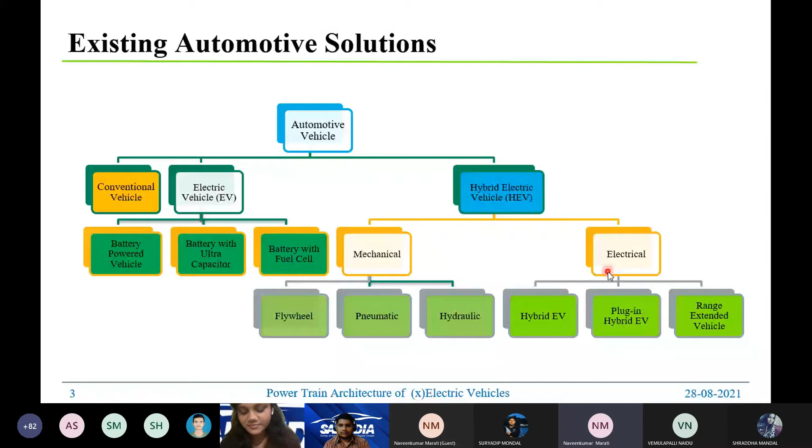So, what is the major market driver for electric vehicles, or different standards of Bharat standard which I might come across today? Today, you might all know we are in the considered stage of Bharat standard 6.

How has it been evaluated, or how has it been made into a vision, because of the first and primary reason being CO2 regulation or NOx regulations, which have impacted us to change from BS1 to BS6 today.

Further, it will be changing into hybrid vehicles or electric vehicles. The regulations have been imposed by the Paris Agreement or by different countries at different stages, and today India has been set a milestone that we have to reach 113 grams carbon dioxide release per kilometer as today's standard by 2021. But western countries like Europe and the US are far ahead of us. In the European region it is 95 grams carbon dioxide release per kilometer, and if you are not meeting this condition, the OEMs will be penalized heavily on their powertrain.

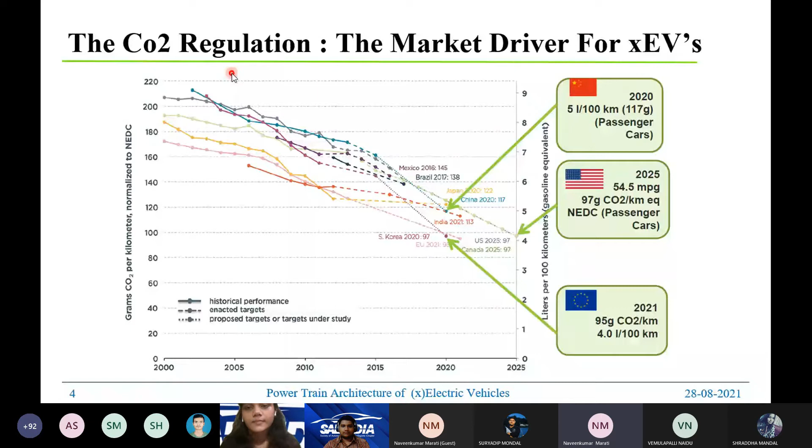So to meet this combination of regulations, one needs to optimize their powertrain. How do they optimize it? As said in the earlier slide, it may be with respect to battery electric vehicles, hybrid electric vehicles, or different optimization parameters in the vehicle. Today we are under the BS6 standard, and tomorrow it may be a hybrid or pure electric vehicle based scenario. So to achieve this 113 grams carbon dioxide per kilometer in 2021, I need to think about optimization in the powertrain. How do I do that optimization?

There are different ways to do optimization, and some of those are listed here, based on where the maximum loss in the powertrain is happening. One of the losses in energy in a powertrain accumulates around 17% in idling mode. What exactly is idling? Idling is when you keep your vehicle in standstill mode during a traffic condition. Generally we keep our vehicle stopped in traffic. During that time, if your vehicle is consuming energy from the powertrain, that energy lost in that situation is called idling. So the energy lost during that particular stage is 17%.

Today many powertrain engineers or OEMs are concentrating on reducing this particular energy loss. With this, there are OEMs who have increased efficiency by 5 to 6% overall. One such example is the latest Activa models, if you can see in two-wheelers.

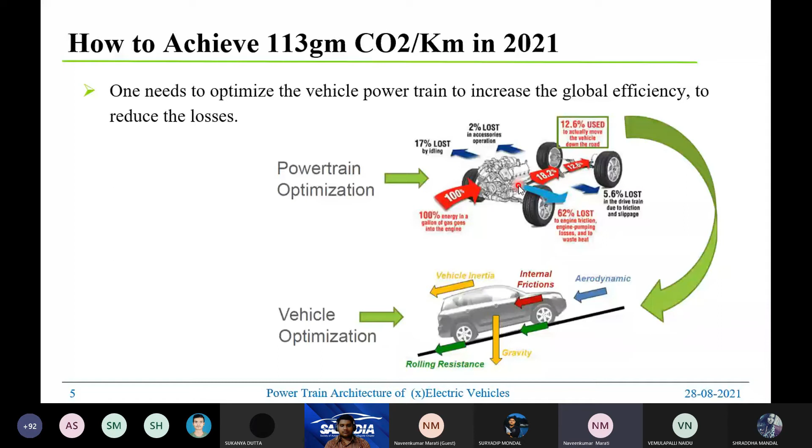So who is going to measure these particular emissions, or who is going to certify these emissions or powertrain certifications, or what is the test procedure that this vehicle is releasing this particular emission in the vehicle? So there are standards called WLTP, which is called Worldwide Harmonized Light Vehicle Test Procedure.

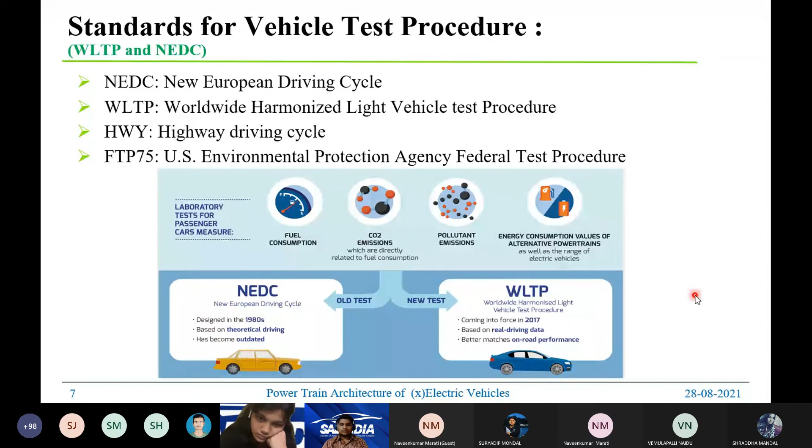So if you see at different speed and different time, it will be tested according to a start and very high speed, and they will stop very frequently, and they will test with different velocity profiles for this particular test procedure. If you see in the blue one, NEDC used to be tested at 120 kilometer per hour, whereas WLTP will be tested at 131 kilometer per hour with real-time driving data on road. So these are the test specifications which are going to certify the emission of the CO2.

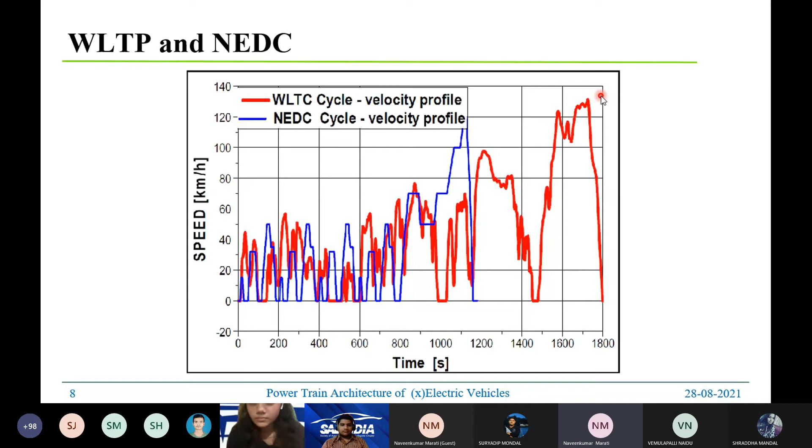And coming to who and how the OEMs have been transitioning to clean vehicles in India, you might have already heard about many of these which I have located here, like many Indian OEMs like Tata, Mahindra, or BYD, which was Goldstone BYD earlier, and today it is Olectra, and Toyota, which majorly gives the electric buses, and Honda, Toyota, and different OEMs have been releasing their models into the market at different stages. And there are the top-end SUV models like Tesla, Audi, that have been entering the Indian market to deploy their hybrid and electric vehicle models in India.

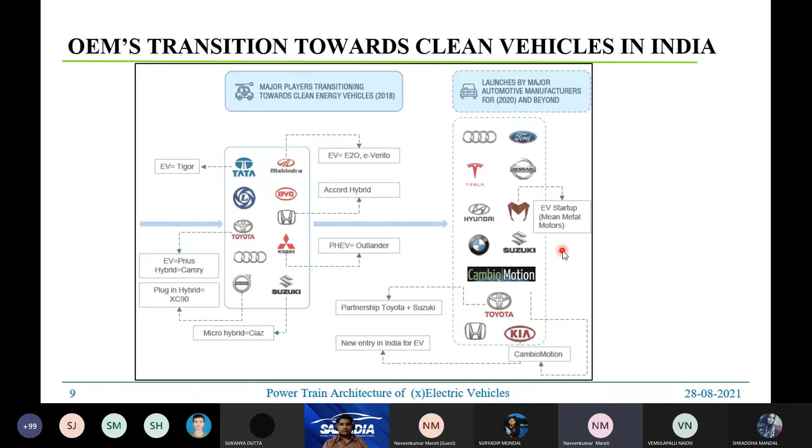And in 2020 and 2021, we have come across a lot of models in four wheelers and a lot of two wheelers, and many startups have been launching their vehicles. And recently, one e-mobility solution provider has launched a vehicle in India at a very good mileage. So this is how India is transitioning from 2018 to 2020 and beyond, how the vehicle launches have been happening, how the market is going to update, and how the Society of Indian Automobile Manufacturers is predicting the sales of total automotive vehicles.

If you see, by 2026, the projection is 6 crore 32 lakh vehicles are going to deploy onto Indian roads. And today, this projection might have increased because of the COVID situation. Everybody has given first priority to health, and in those situations everybody is looking for a personal vehicle. So this projection has also increased, and at maximum it may reach 7 crore 44 lakh vehicles, and a median of 6 crore 88 lakh vehicles may deploy onto the road with a GDP of 5.8%. So this is an overall basic picture of why and how the growth of hybrid, electric, or conventional vehicles in India is projected till now.

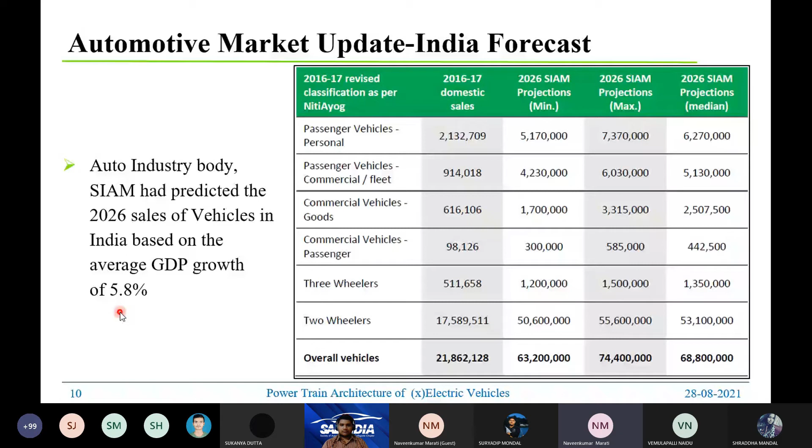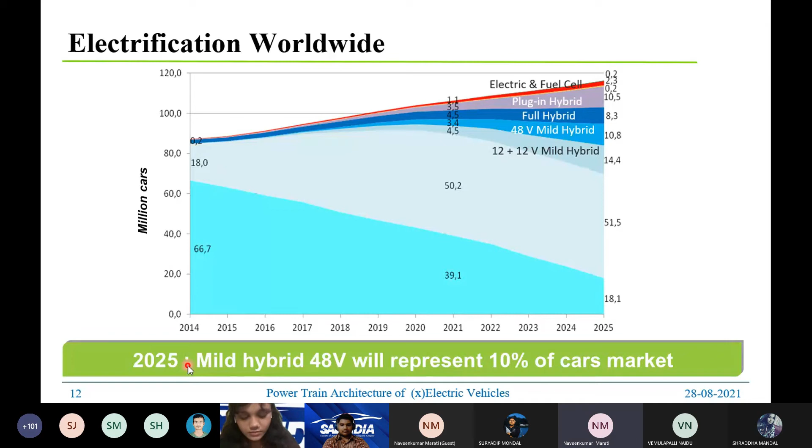And the electrification worldwide is here. If you see, the millions of cars sold with respect to the years is deployed here. This is mainly for the four wheelers. By 2025, 48-volt mild hybrid will represent at least 10% of the car market. So the 48-volt mild hybrid will play a crucial role in the automotive revolution by 2025, in fact.

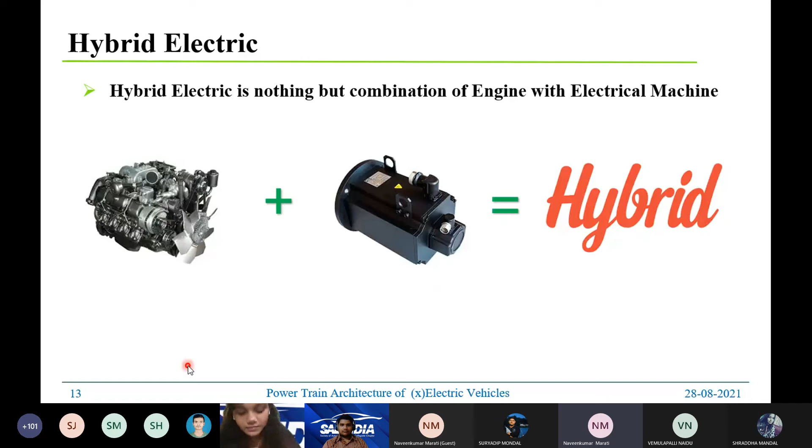And what exactly is a hybrid electric vehicle? It is nothing but a combination of your combustion engine plus an electric machine. So how this electric machine is going to assist this engine will classify different hybrid electric vehicle topologies. Based on where the machine is kept and how it is going to function, that will describe whether it is a mild hybrid, a micro hybrid or a plug-in hybrid in the hybrid electric vehicle classifications.

So the first commercial hybrid electric vehicle, you might have heard, is the Toyota Prius in 1997. Prior to that, in the 1900s, the first hybrid electric vehicle came, and the concept of hybrid electric vehicle started with the phenomenon of regenerative braking in the electric vehicle. At that time, the electric vehicle used a 6-volt lead acid battery. And till now, more than 11 million Toyota hybrids are sold worldwide, and many other OEMs have entered and are selling their hybrid models in the market today.

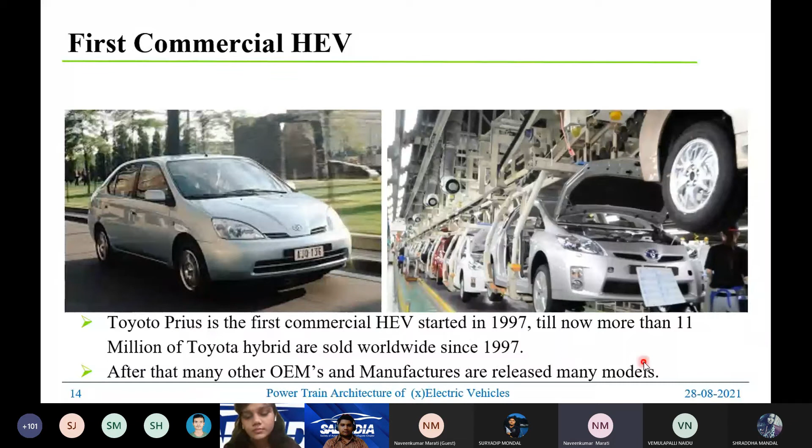So these are the 5 extra components added in your vehicle when you compare a simple conventional vehicle with a simple hybrid electric vehicle. And you will see there is an extra auxiliary battery, which the conventional vehicle generally has as well, to power your infotainment system. So we will discuss in detail how these configurations happen and what the features are which differentiate your hybrid electric vehicle powertrain.

First one, as I said, idling stop, which is nothing but a stop-start system. When the vehicle stops in traffic, your vehicle should not consume any energy from your engine, which is called the idling stop condition. Second one is energy recovery through braking, called regenerative braking: when your vehicle is in braking mode, energy should be recuperated into the battery. During that time, your bidirectional converter will activate and convert AC energy into DC.

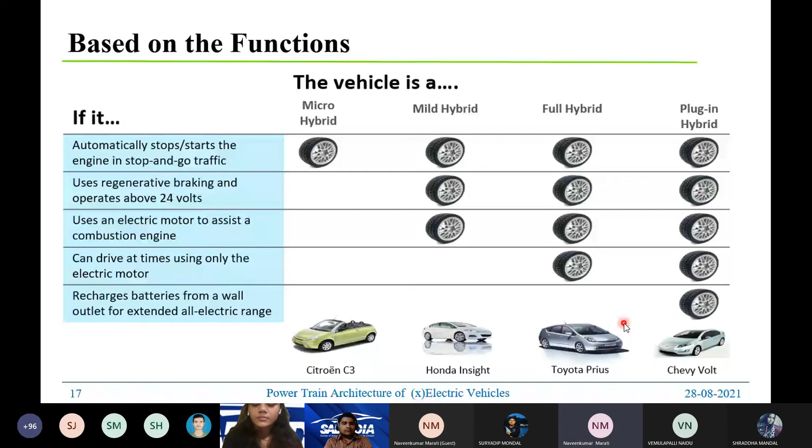And what are the powertrain requirements? Means how do you select which engine, what is the engine capacity unit, or what is the machine capacity unit, and how it is going to require. So when I go with a vehicle in the market, customer is going to look for some of the features or the technical specification requirements in the vehicle. So from there, the requirements of the powertrain will come.

So first one is, the requirement of powertrain is to develop sufficient amount of power to meet the demands of electric vehicle or vehicle performance, carry sufficient energy on board to support vehicle driving in the range, and demonstrate high efficiency with low fuel emissions. These are basic requirements for any powertrain which a customer looks for.

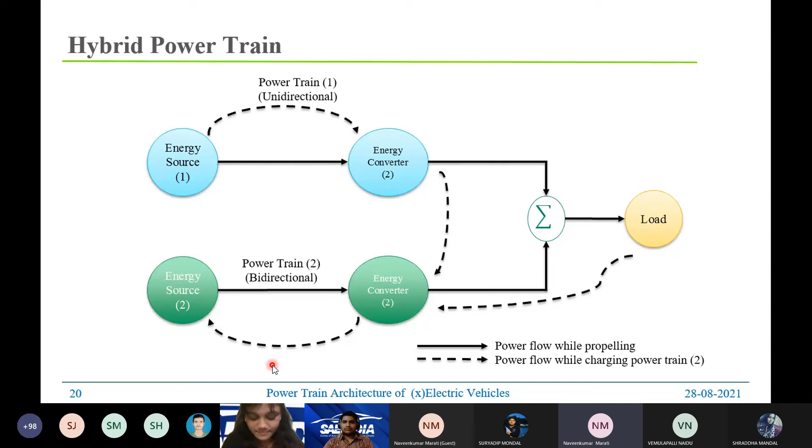other few conditions as well. We will see the next slide. So these are different ways of the energy exchange between your source 1 to source 2 and to the load, and this is how different levels of power delivery happen between your powertrain 1, powertrain 2 and the load.

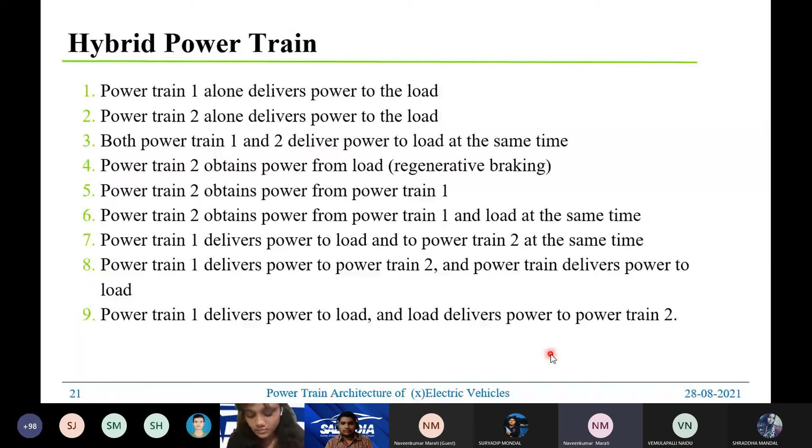So how the classification of hybrid electric vehicle happens, or the main agenda of today's topic, architecture definition of hybrid powertrain. So the architecture of hybrid powertrain is classified majorly into four, but in the market you may see popularly two, which is series hybrid and a parallel hybrid configuration, and there are two more, series parallel hybrid and a complex hybrid structure, which are not much popular or at the research stage itself.

That depends on requirement. So in the series parallel, you will use both the ways. IC engine will connect as well as it will charge the battery. And there are three machines used in the complex hybrid, which is not much popular. And series parallel may be much used in commercial vehicles like buses at least. So if you see in the series hybrid, there are two electric machines used. One is the generator and the motor. Whereas in the parallel hybrid, you will use only one, which is electric motor in it.

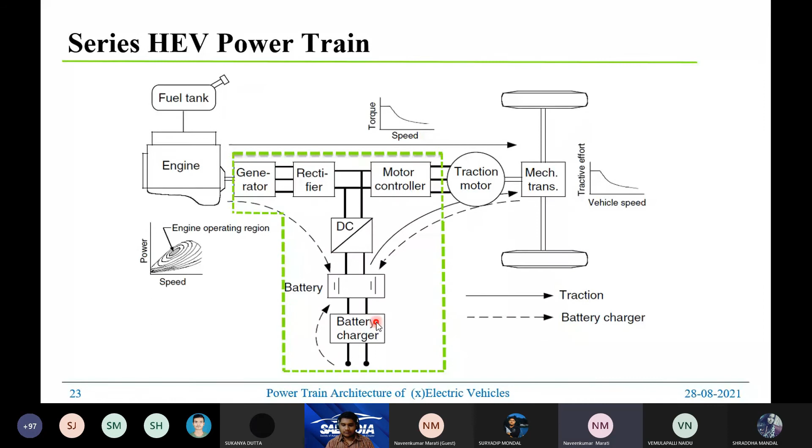And there are particular operations we have here: pure electric mode, pure engine mode, a hybrid mode, engine traction plus battery charging mode, a regenerative braking mode, battery simple charging mode, and hybrid battery charging mode. So these are the different varieties of operations that can be performed on this series hybrid architecture.

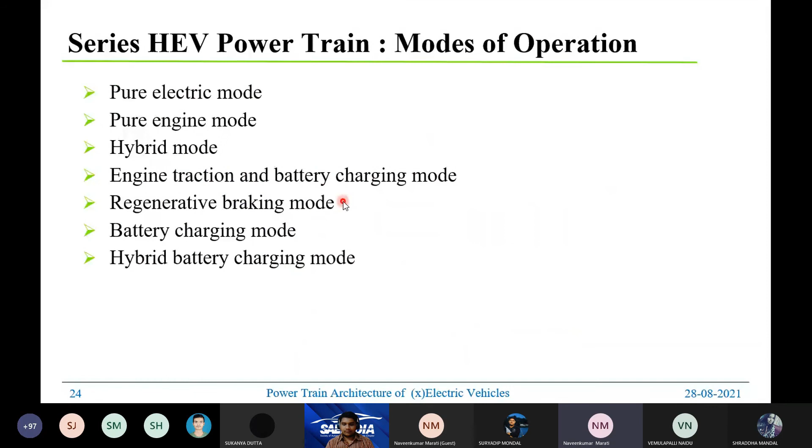If you give the command acceleration, then the vehicle controller will immediately speak with your engine controller and peak powering source, as well as the motor controller, to provide a certain amount of power requirement to accelerate the vehicle at a required acceleration level or required deceleration level.

And if the operation command from the driver or the user is the braking mode, it will directly give the signal to the vehicle controller. Further, the vehicle controller will give the instruction to the motor controller and mechanical brake so that the vehicle speed will come down as well as the braking will happen in the vehicle wheels.

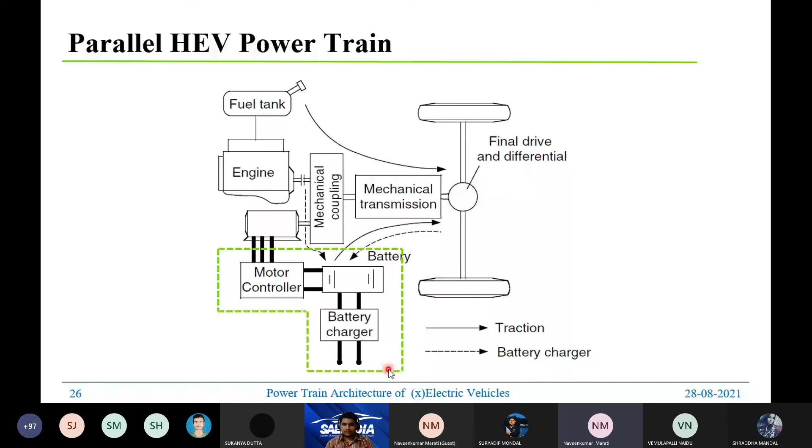So the different operational modes which we can expect here are hybrid traction mode, where both engine plus your electric machine can assist to drive the vehicle at a certain speed. Then engine alone traction mode and motor alone mode, regenerative braking mode, and battery charging from the engine. So these are typical modes of operation in the parallel operation.

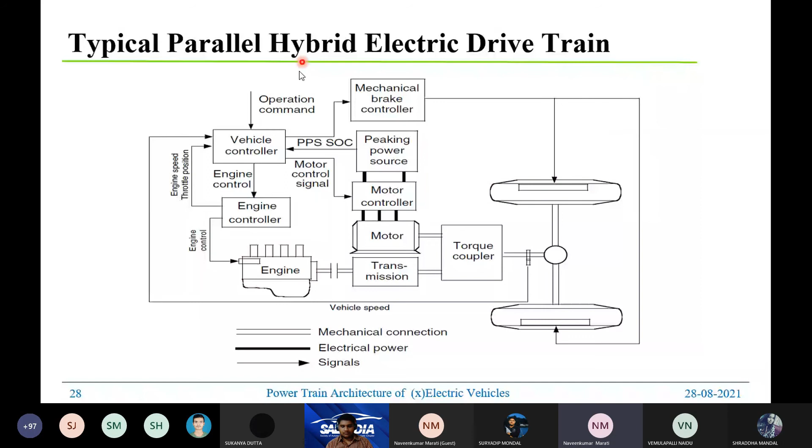And the commands will come again in the same fashion: the vehicle user can give the commands acceleration or deceleration or braking mode. Based on this, the vehicle controller will activate engine, motor, and the brake controllers depending on the requirements. How exactly this vehicle controller will behave internally, we can see in the next slide. So if you see the acceleration pedal, when it gives the signal, the command goes directly to the engine power command and the motor power command, which is in the propelling mode.

And simultaneously, depending on the power requirements, the engine and motor can give the power to the wheels, or the motor alone can give the power to the wheels, or the wheels can give regenerative power back to the peak powering source. And if it is braking, then the braking command will come to the friction brake controller, and finally it will actuate the brake mode. So these are the control scheme operations for the parallel hybrid architecture.

So depending on the command, it may actuate pure engine mode or pure motor mode or a combination of motor plus engine mode, or the braking mode. So these are different philosophies in the control. This is an overall view of the control, but different control algorithm strategies will be implemented in your hybrid control unit to activate these control algorithms in the hybrid electric vehicle.

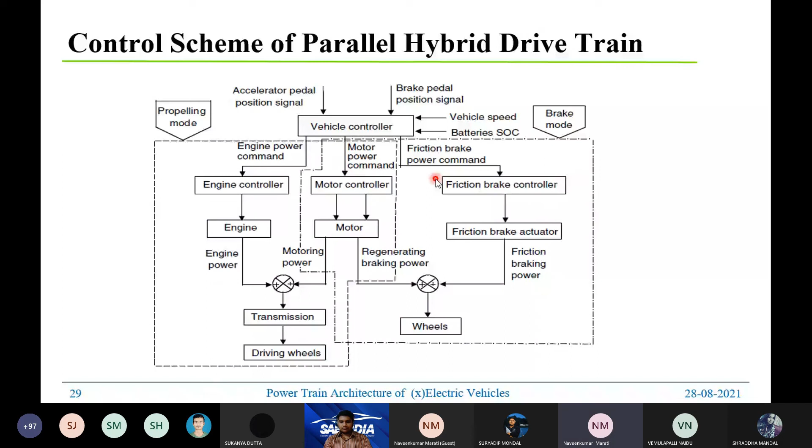And again, if you see the parallel hybrid architecture, this is how it looks in a vehicle. But there are different configurations like P0, P1, P2, P3, P4, and P5 architecture. These are the configurations in the parallel hybrid architecture. What are these P0, P1, P2, P3, P4, and P5 configurations? How has it evolved?

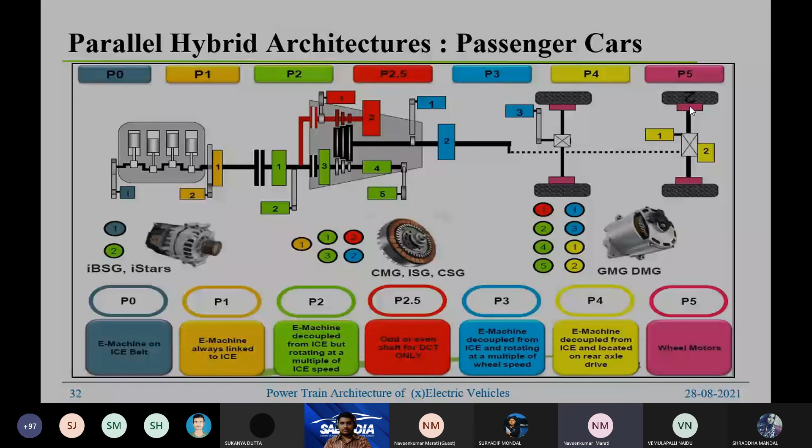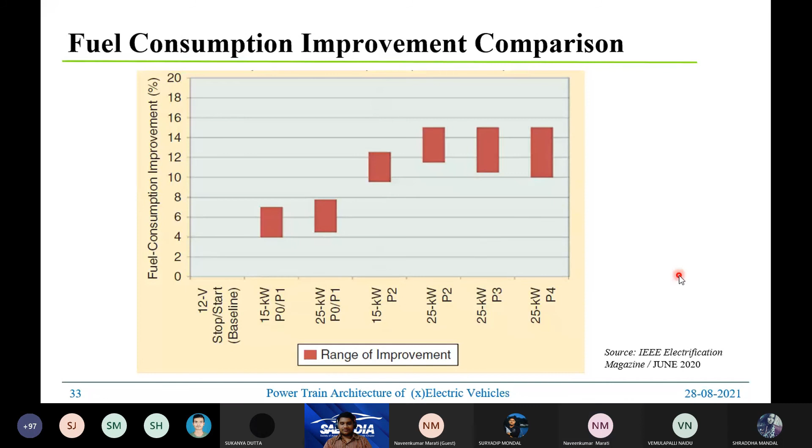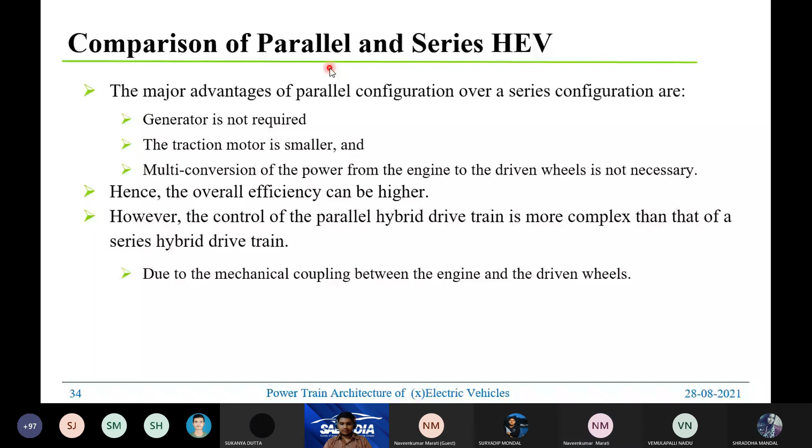Comparing parallel and series hybrid architectures, parallel has little more advantages over series, where it doesn't require a generator, the traction motor is smaller, and multi-power conversion stage is not necessary, so the overall efficiency can be higher. But the difficulty in parallel hybrid is that control architecture is more complex compared to series hybrid, due to the mechanical coupling between the engine and the driven wheels, which is more important to control.

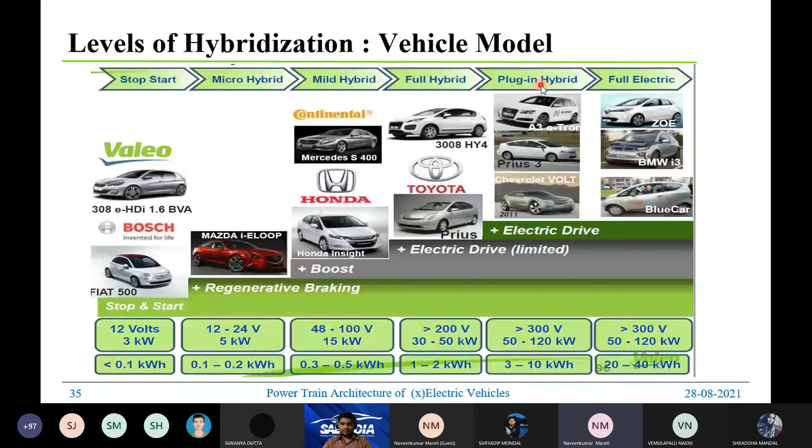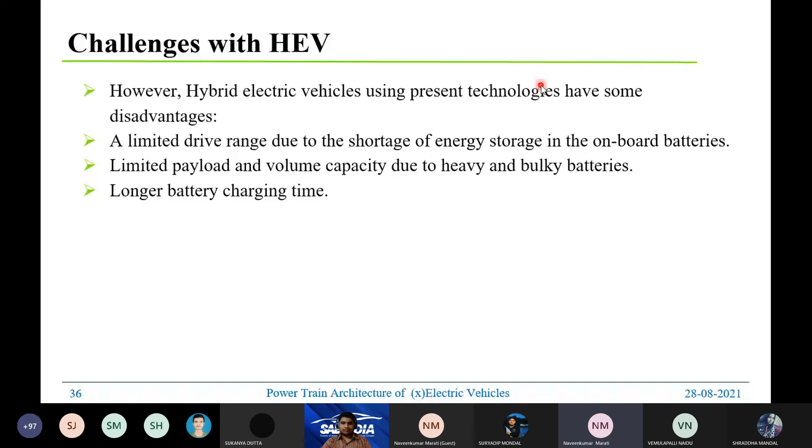These are some examples of powertrains available in the outside market. Finally, the challenges with respect to hybrid electric vehicles are: with present technology, the range is limited because of the energy storage element available in the vehicle, which are your onboard batteries. With hybrid, vehicle weight will increase compared to conventional vehicles, meaning limited payload and volume capacity due to heavy and bulky batteries, and longer battery charging time is required for HEVs. If this can be achieved, there can be a lot of advantages compared to conventional vehicles to move forward in the hybrid electric vehicle domain.

And with this, I end here. If you have any questions, I'm open to take them.